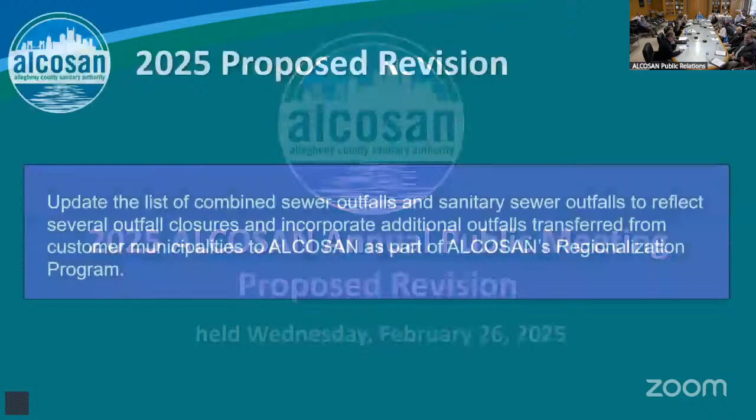All right, now you're going to make me work this one, Derek. Okay, there we go. So the first revision to the consent decree is to update our list of combined sewer overflows and sanitary sewer overflows. That consent decree was written in 2008, which had our original outfalls, but as you know, our regionalization program has taken off and we have adopted more outfalls, and now we want those included in our consent decree. So when we go through revisions, we'll be continuously adding those as we incorporate them into our system. That was the first proposed revision.

The second proposed revision is that we're providing a process to eliminate a primary treatment tank. That elimination is, we have a redundant wet weather tank in the wet weather plan, and this elimination will still provide equivalent treatment. It will have the same end results and it meets the goals of the consent decree. So the provision is to eliminate this tank and have the agencies incorporate that into our revised consent decree.

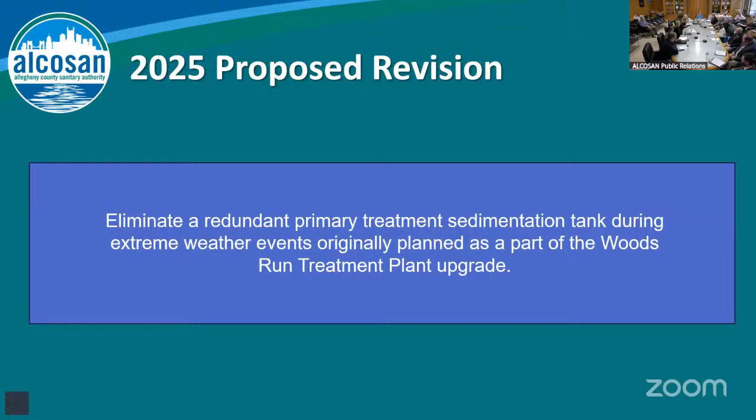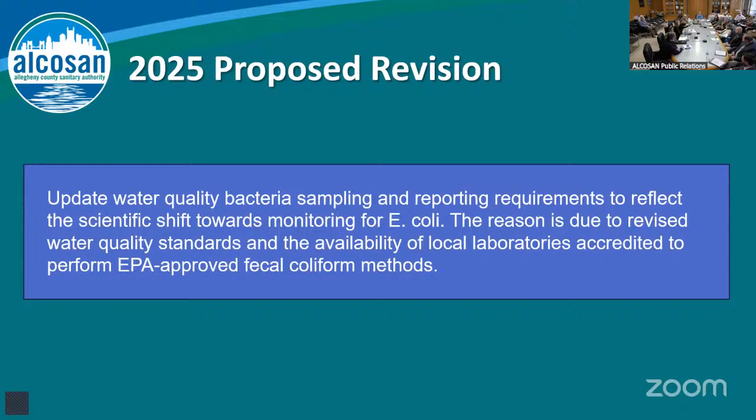And the last change is kind of minor, but not really. We have fecal coliform in our consent decree for water quality bacteria monitoring, and since the 2008 consent decree, E. coli has been more the parameter for measuring water quality. Furthermore, fecal coliform on surface water has to be monitored by a membrane filtration method, and labs aren't readily using that method any longer because there's a new color method that's easier, but that's only used for E. coli - on surface waters you can't measure fecal coliform with this improved method. We've been meeting with USGS, the US EPA, DEP, and the health department on this, and they are in favor of this revision, and we will materialize that in our request.

So you're doing testing of stream water? Yes, water quality monitoring below the outfalls, in general, as part of our post-construction monitoring plan. So as we do revisions and implementation of the clean water plan, we will do water quality monitoring and produce results in a model to perform like an outcome of the improvements.

How do you separate someone who's upstream from this? That's the beauty of the model - it will be able to simulate how we cause or contribute to water impairment, how the outfalls do. So the model will take into account what's coming into our system, what's in our system, and what the water quality is as it leaves.

Do you monitor just along the rivers or do you go up in the tributaries? They'll be up in the tributaries as well. Like in Shaler, I mean, I have a sanitary sewage treatment plant north of me.

That is why the use of a model is necessary, because you can add those nodes into a model to simulate the water quality. This is a model that ALCOSAN has established for many decades, and the added data we're adding now only builds on this analysis. It's incorporated into our consent decree as a requirement as well, and the plans have been reviewed up to this point for us to start the monitoring by the EPA.

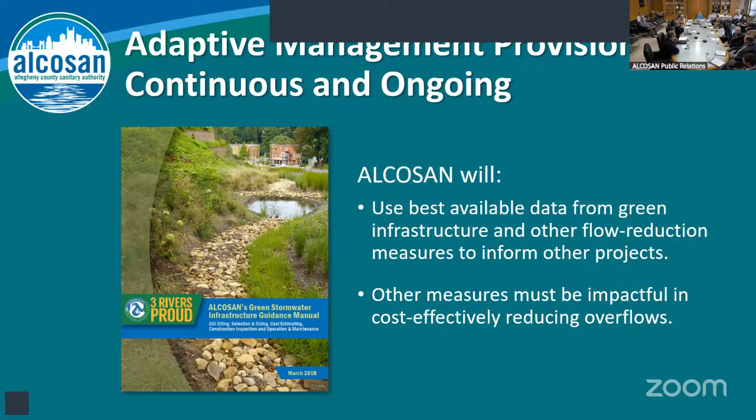Yeah, the YouTube, it is worthy. I know Jeff Ardress does a great job at the flyovers of the plant, and that's really impressive when you see it from a flyover and some of the animations that Jeff provides, and others as well. We have grow, regionalization, and the tunnels—those are the four pillars you can navigate through at that meeting. So it's a great one to revisit.

All right, thank you. Thank you. Very good, very good.

And next we're going to have a recap of the ALOM conference and the various presentations and activities that ALCOSAN participated in.

Ready? Yes, report to the advisory committee. Who was at the ALOM conference?

Oh yeah, I was there. So, Sharon, do we have the gifts for the people that were not there? Yes. Okay, so Patty and Lloyd need the gift, since you didn't get the lunch. And you're going to get the gift.

We had a great attendance at the meeting. We had some terrific comments afterward. But we wanted to review with you what we said so that you could ask more in-depth questions if you wanted to. So I guess I should toss it to Julia, right? She's the first one on the agenda. Julia is here somewhere from the regionalized world.

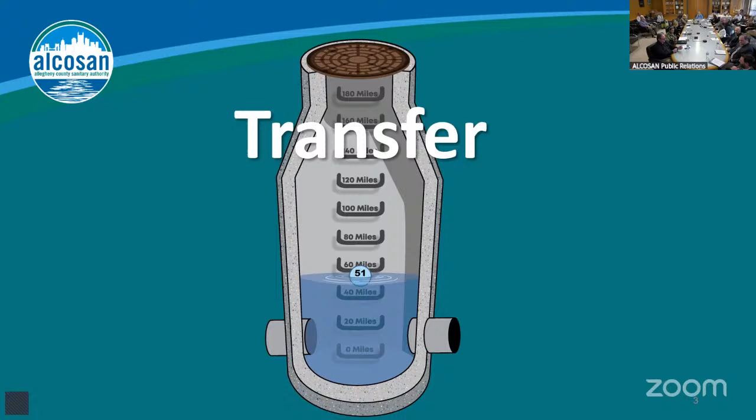If we go on to the next slide, we begin to look at why the program exists. This is one of the 4 pillars, as Michelle mentioned, of the Clean Water Plan—the pillar focused on improving the infrastructure that's there. Regionalization is truly about improving that system that has existed and served the region for over 100 years now. Many of the permits we look at are from 1929, 1930, so this is infrastructure that's been the backbone of our region. And now we transfer it, meaning operation, maintenance, and future improvements come along with that transfer to ALCOSAN as well.

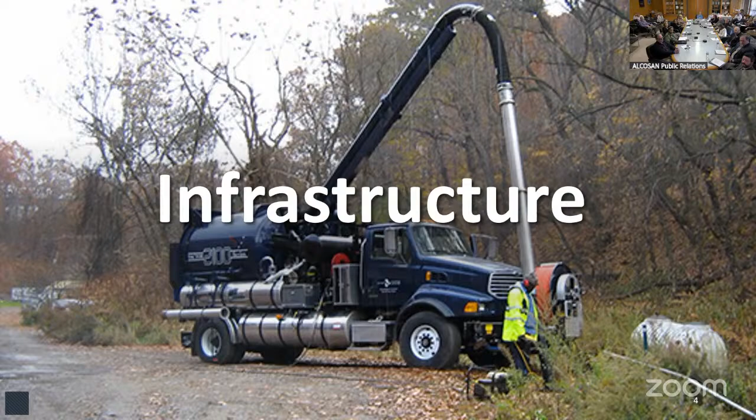Going on to the next slide, we're looking at the streamline of compliance. I mentioned those permits we've been reviewing—once they're transferred to us, we become the permittee for those miles of sewers. I think it's really important that we're also responsible for the overflows and the regulators that come along with them. In total, there's a little over 80 that are eligible to transfer. We've now had 7 CSOs and 4 SSOs, and actually it's more CSOs with this final A68 transfer that came over.

So immediately, our crews begin going out, inspecting, monitoring. You'll see the CSO signs with ALCOSAN contact information and notification go up at those locations. Tim and his crews begin flow monitoring so we know how to ultimately control or eliminate those structures. We become the point of contact. Through regulatory agencies and collaboration on the COAs, many of those projects are saying, here's how we'd ultimately have to eliminate that SSO.

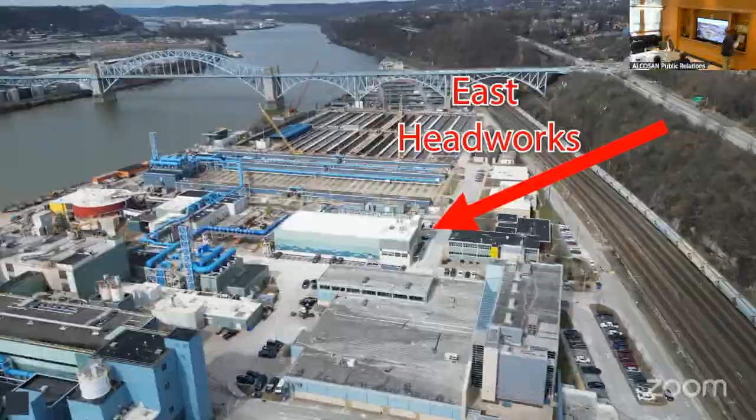Where we're going to stop first on the tour is the East Headworks facility. You've likely seen this if you've come out to open house. It's been the backdrop since 2021, and it's been different every year. The first year it was just a deep hole. Eventually, you can see the foundation being poured.

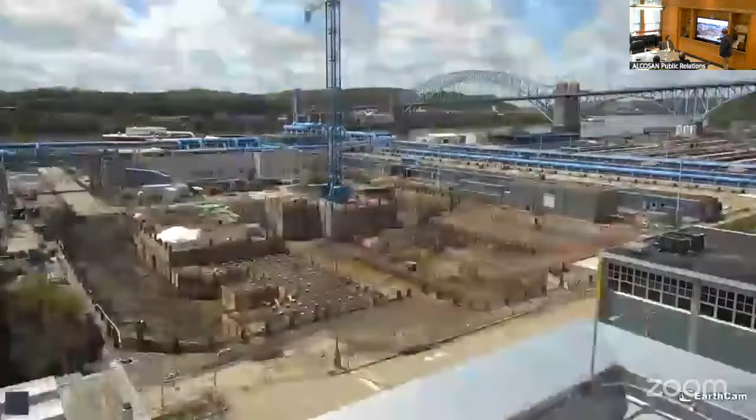Our tower cranes were a big highlight in an open house one year.

Eventually the concrete starts being poured, and you're going to see a large concrete pour in this area. That happened in July of 2023. The steel went up, and we highlighted the topping out of this last steel beam in August of 2023.

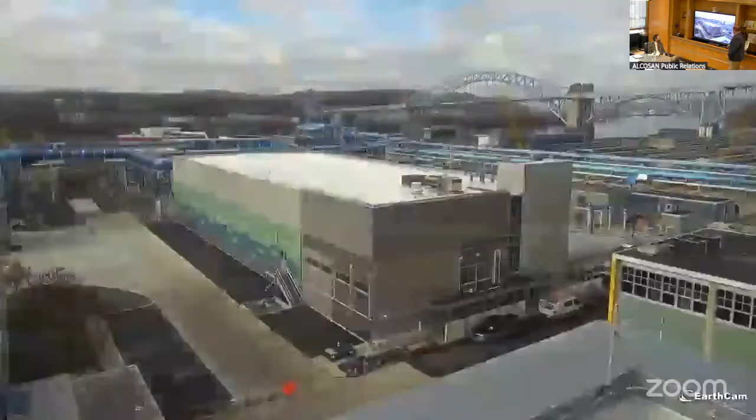So that was the backdrop of Open House 2023. In the time since, one tower crane's been gone. Eventually you'll see the other one go, and you'll see the concrete pavement coming along the side. So again, this will be the backdrop for Open House 2025, but we're going to see a nice, beautiful building.

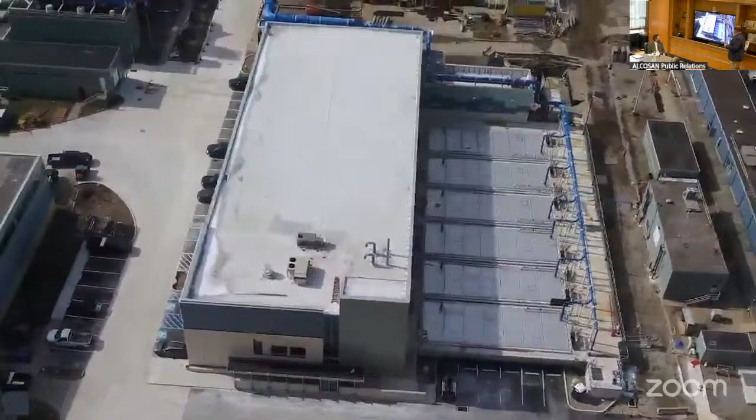And so our facade, you've got the drones circling it. You can see all the different sides. The blue piping, what that is, that's our odor control system. This is all tying into our existing odor control system to make sure that our neighbors are getting treated air around us.

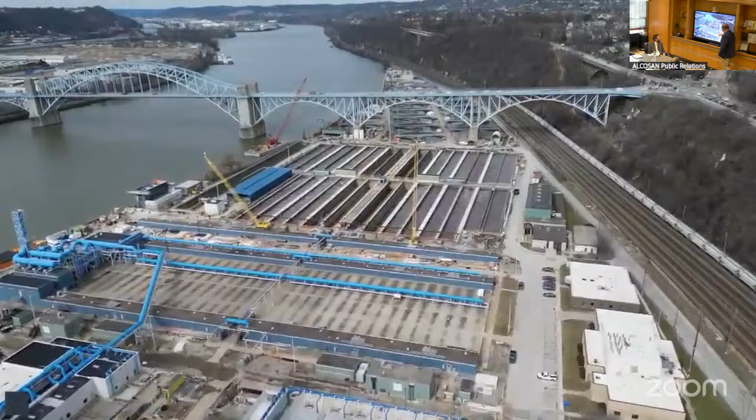As our tour continues north, you'll see our primary sedimentation tanks. This is where we're going to build that new one. These are the two buildings that have to come down as a part of that. So those staff moved into that environmental compliance facility.

Our next stop on the tour is our CSO bypass and disinfection project. This project's been under construction since late 2022. We really started to break ground in 2023. And where a lot of the work has occurred to date is back in this area.

It's really hard to see. I promise in the next couple slides I'll show you some overhead views. But that's the connection point between primary treatment and secondary treatment.

The other thing that we really have to show for this project is this new chemical building. We are in the riverfront zone, so we did have to work with the city to make sure that the facade of this building looks like a nice, beautiful image from the river. And so that is what you're seeing with this building.

So we've got the facade built. We haven't moved any of our chemical tanks in there quite yet, but you can see the building itself is just about complete from the exterior. The final piece of this is a reconfigured bypass disinfection tank.

These next videos will really show what the purpose of that is. We've actually just earlier this week placed a time-lapse camera kind of towards the bottom left of this screen. So hopefully in the next year we'll have some nice imagery to show as far as what's happening up here.

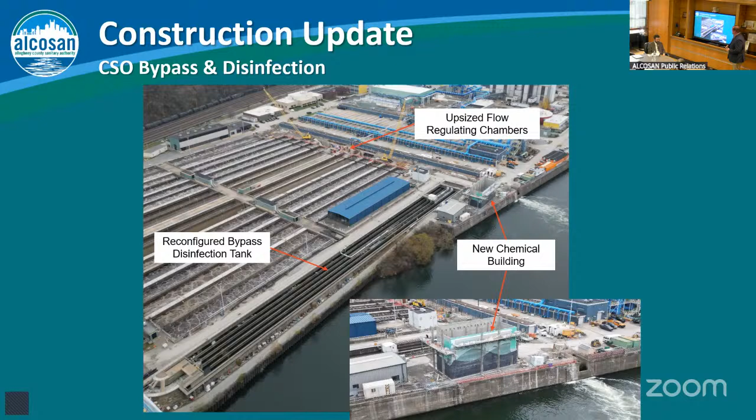Those upsized flow regulating chambers, where a lot of that work has occurred in the last couple of years - what I have here are three images that show the process. The bottom of your screen, that's primary treatment. The top is secondary treatment. The only thing connecting these two treatments is this buried piping. It's not an open channel where flow goes through.

This is where we actually measure plant flow. It's the one master location. We've got eight different connection points that connect primary treatment to secondary treatment, and we're replacing them in pairs. The first two were the two towards the middle, one on the east, one on the west.

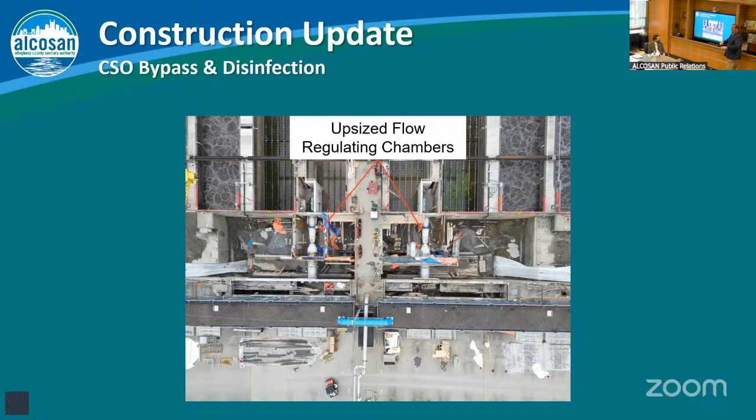So here you're seeing the exposed piping. You have to keep in mind, this is usually buried piping, below a road. Eventually, over time, you can see our concrete starting to be formed and then poured. I don't believe I have any images today, but we've actually just turned phase one, which is these two pipes, on. Eventually this will come back up to the surface, be backfilled, and it will be a road again.

What we really had to do here is increase the size of the piping because, as you all know, our plant expansion goal is more than doubling our plant's capacity. So we have to get from 250 million gallons per day up to 480 million gallons per day through these pipes, and the only way to do that was to upsize.

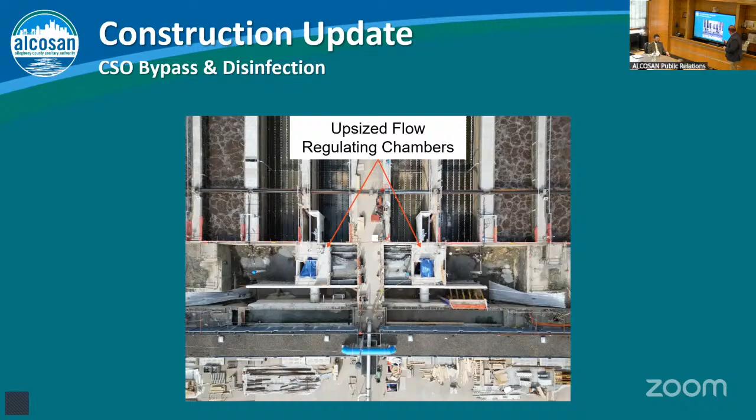The other thing to highlight, and again I showed this at ALOM, but as a reminder, this is that area where we just put that time lapse. What's happening here today is all being demoed at that northern extent.

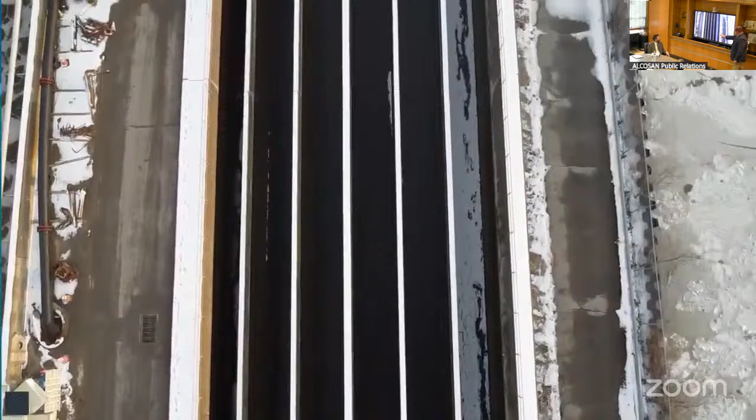What you're seeing is from January 15th - I took this video showing we don't have flow in this chlorine contact tank. This was during a secondary treatment shutdown where we had to do a major construction element of our North End project and this project.

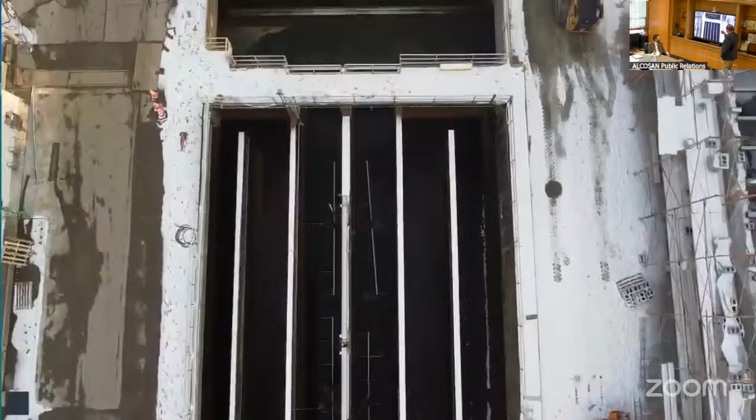So what we're seeing is the path that our flow has taken since 1970 when secondary treatment went online, and eventually you can see it goes out to the river, and that's our old outfall.

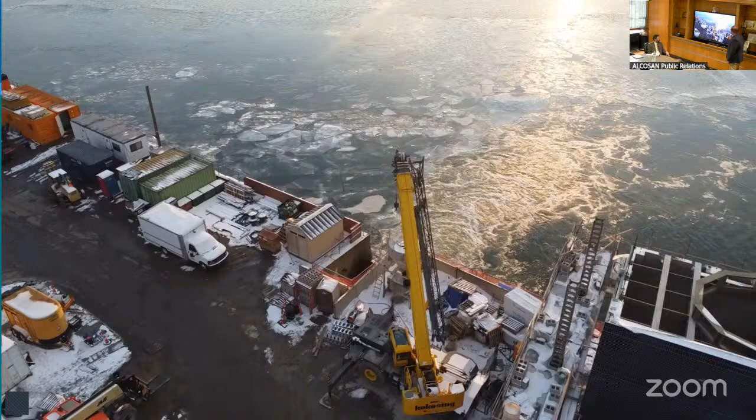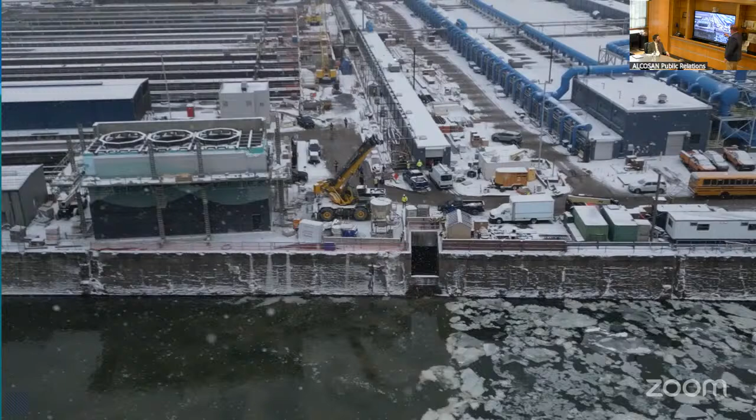This transitions into a video from the outfall showing the final moments on January 16th when we retired our outfall. The drone is going out into the frozen Ohio River, and it really gave a good delineation of where our outfall was. You can see it settles, there's no more plume, and that's the retirement of our legendary outfall that's been in service since 1959.

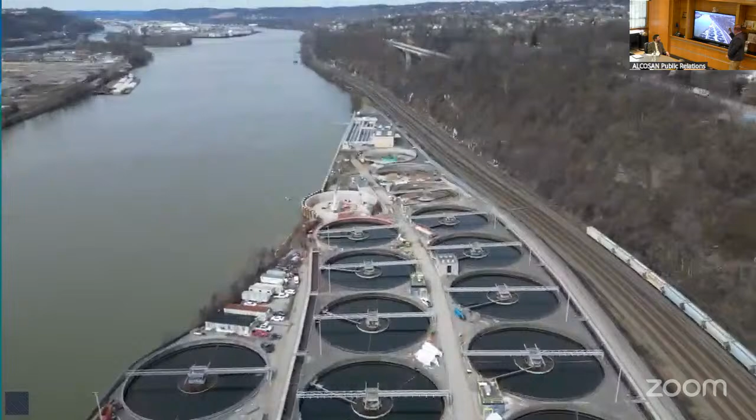As I mentioned, you have to remember we bottled up all that flow. We stopped discharging it to the river, so we had to figure out where to send it. This is where we're going to go next - we're flying north all the way to our North End project.

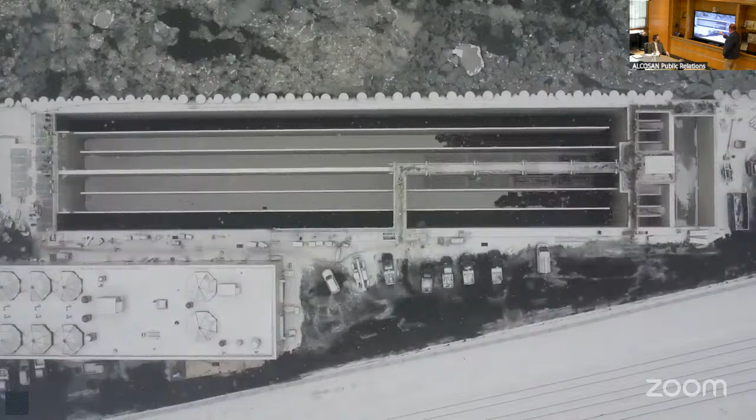On January 16th, once we started bottling up, the flow reversed direction, and we sent it to this new chlorine contact tank, our new disinfection tank. What you're seeing is a video sped up about 10 times - about 15 minutes of that contact time.

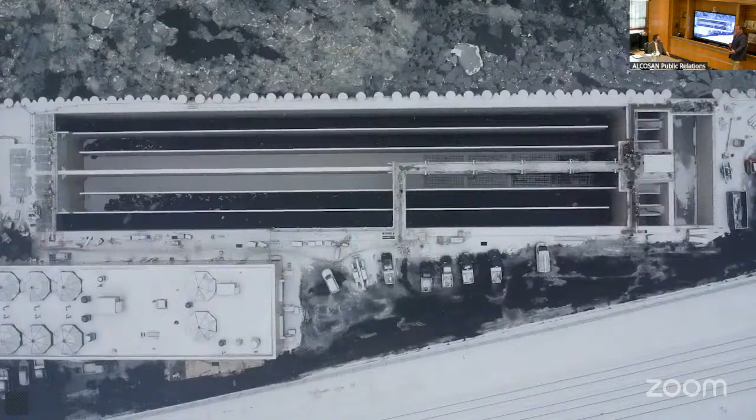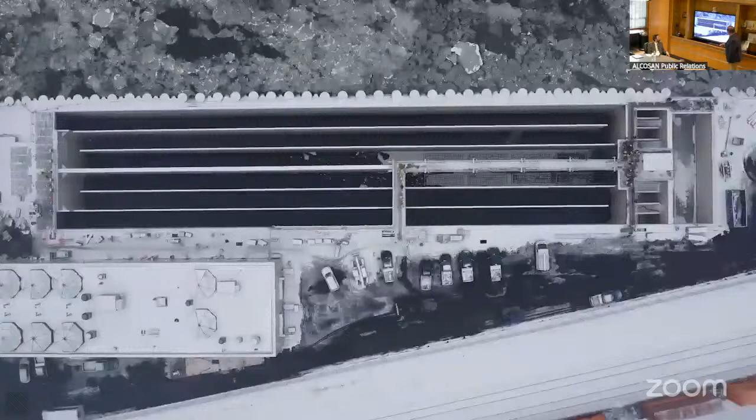The treatment process and disinfection, that's how it works - you have the chemical interacting with the flow. So you're seeing the first drops of flow going through our new disinfection tank. What you're seeing over here are our air diffusers to mix the chemicals, but also to add oxygen prior to discharging it out of the outfall.

Eventually what happens is the water raises up in this disinfection tank - it's about 15 feet deep - and eventually it overflows into these new troughs. This is our new effluent.

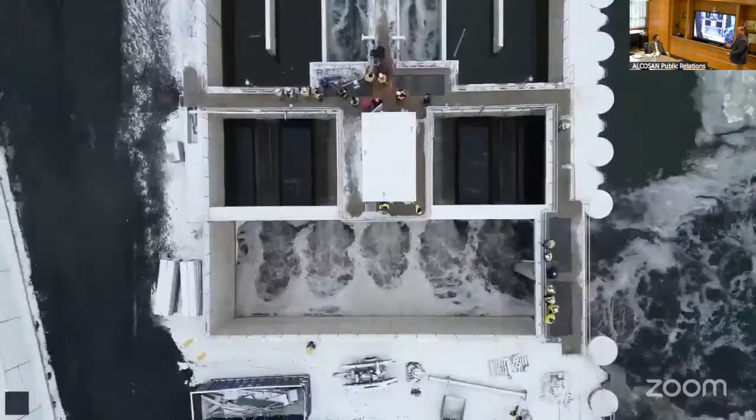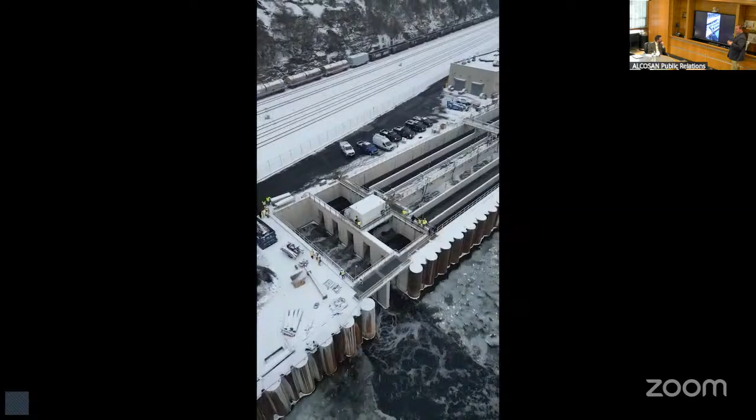I think it's a beautiful image. I mean, it's a sewer outfall, but it is a nice looking outfall, and I think it's something we should really be proud of. So these are the first drops going out of our new outfall - all that flow we bottled up at our old outfall is now going out our new outfall.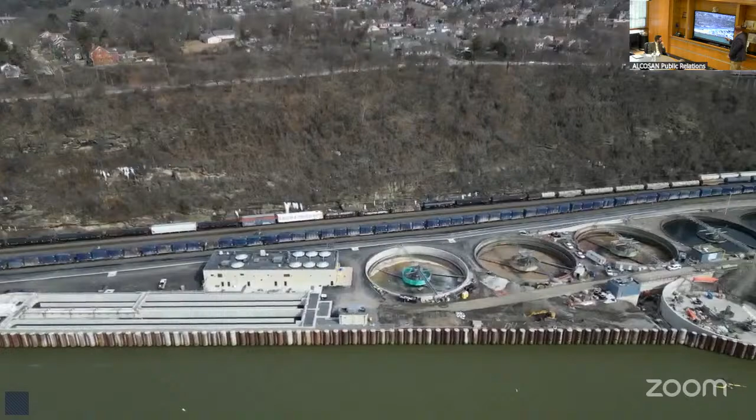So we'll continue going south again. This is the final detail of our North End project. We've turned on the disinfection piece of our North End project, but how we're going to get up to 295 million gallons per day later this year is by completing WFS9.

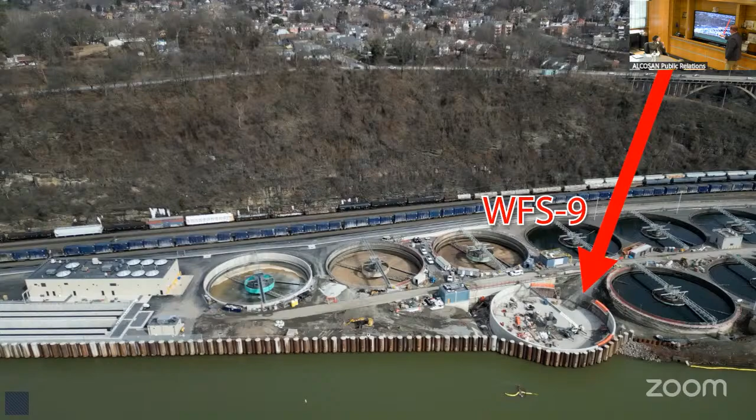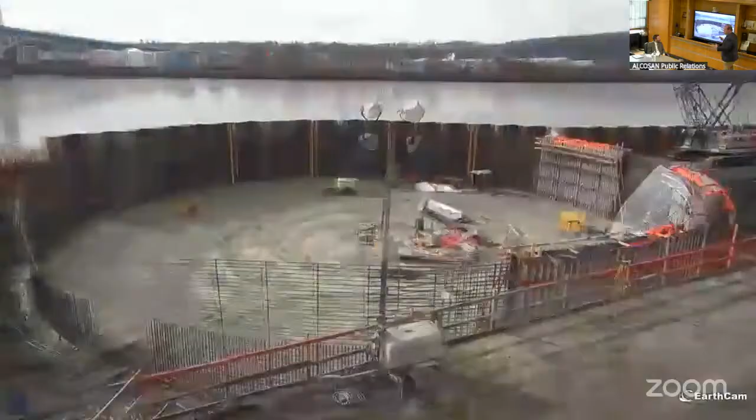The other item is EFS9 - we're mostly done with that one, so the focus has been WFS9 over the last year. We've got about 8 months of construction sped up in this time lapse. You have to remember, this is a 140-foot diameter clarifier. It doesn't really come across like that in an image, but this is a giant one.

This is going to bring us to a total of 18 - we've got 18 140-foot diameter clarifiers. Once we activate this at WFS9 later this year, that will get us up to the 295 million gallons per day.

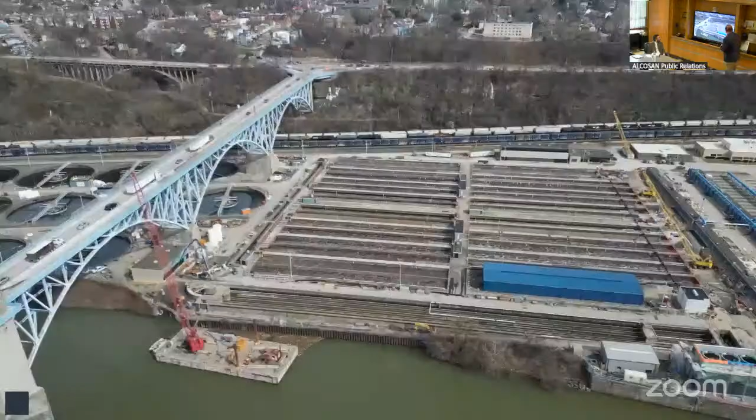Then we're going to head to our last stop. We're going to go south of McKees Rocks Bridge again. We're going to end up going by our main pump station, that red building, which you've all been on a tour before, and you've seen into that wet well - that's the location of it.

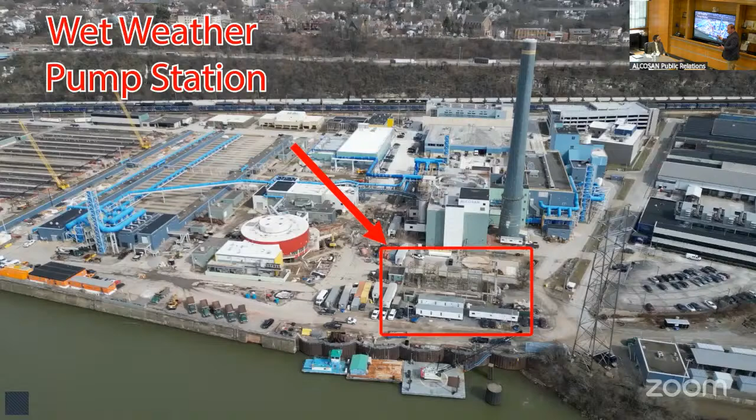But our final stop's actually going to be a future project, our wet weather pump station. What you're seeing in the background is just a dead substation at this point - we have to demolish that to get started.

What I really want to highlight here, because I'm going to hand it over to Sean next to talk about the tunnel, is this project is the connection point between the plant expansion program that I'm talking about, and also the tunnel program that Sean's going to be talking about.

So here's that wet weather pump station, here is that existing main pump station - it's about 200 feet right across the road. And then also what I'm showing here is our dewatering tunnel. It'll be about 160 feet deep, and it'll connect from our wet weather pump station to the first Ohio River Tunnel shaft.

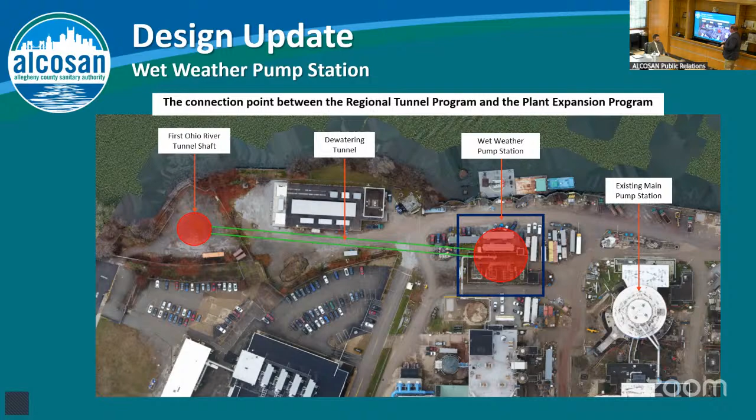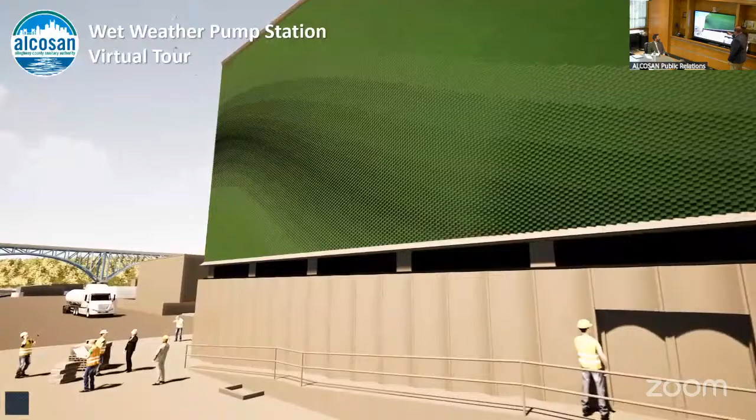So I do have a virtual tour of this wet weather pump station. Starting off, we're on the west side facing the river - a reminder, we're in the riverfront zone, so we need to make sure that the facade accessible to the public is showing a nice image. What we've done here is cost effective, but it's also a nice looking building - this is really just standard brick with different angles showing off different shades as you walk by.

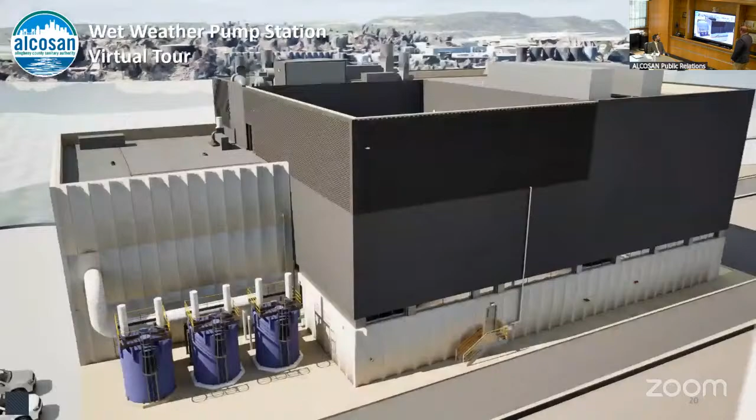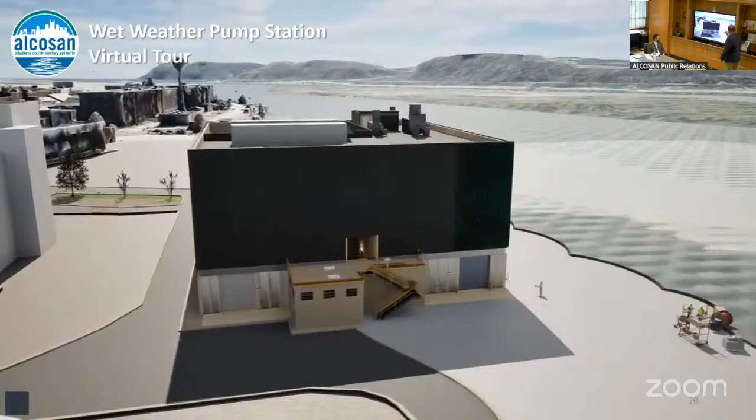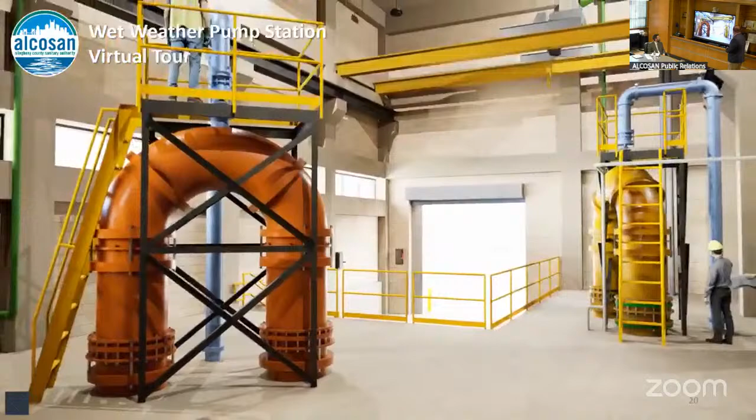This is siphon piping. So we've got 6 of these for each of the 6 pumps that are down in the basement. What this does is the flow goes over this and then discharges out into treatment at the rest of our treatment plant. Then we're going to enter our elevator, and the elevator is going to take us down about 150 feet down to our pump level.

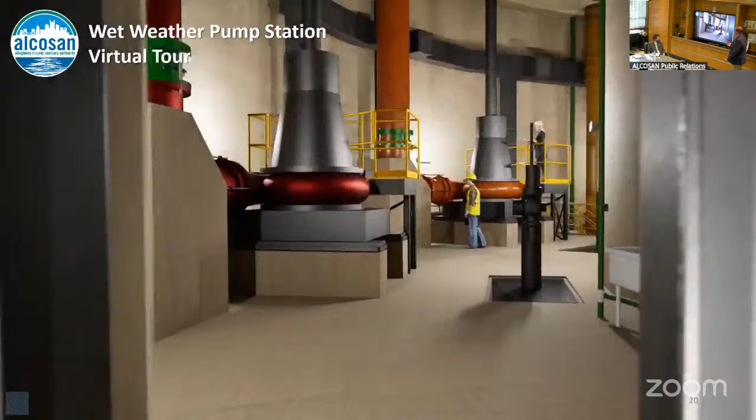This is a stop on the tour in the main pump station that we don't usually get to take. We don't get to take people down to our pumps, but because it's a virtual tour, we're going to get to see our 6 pumps down here. And you'll notice 4 at the one level, and then we're going to fly over the 2 at the farthest end. And there's a reason for that.

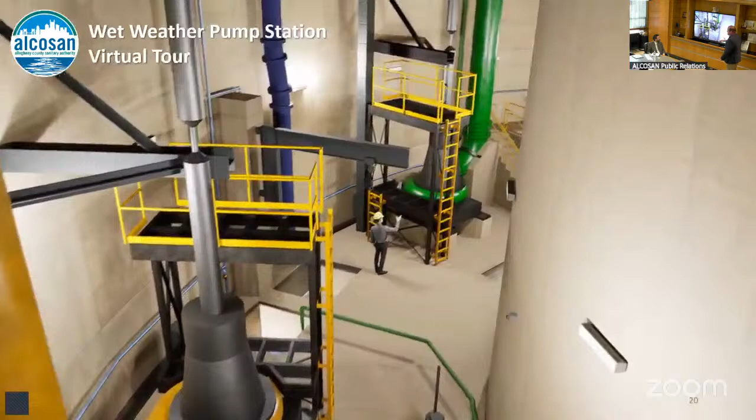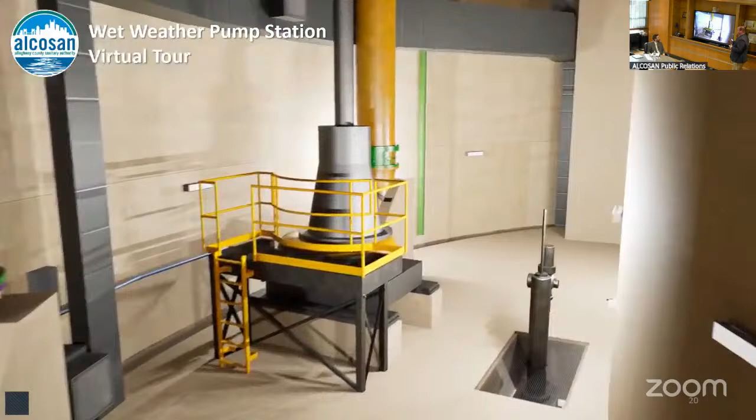This tunnel is going to operate at multiple different elevations. It's going to operate as low as 5 feet and as high as up to almost 95 feet in the tunnel. And so these pumps really have to operate against a lot of different static head conditions. And so because of that, we have 2 pumps at a lower elevation.

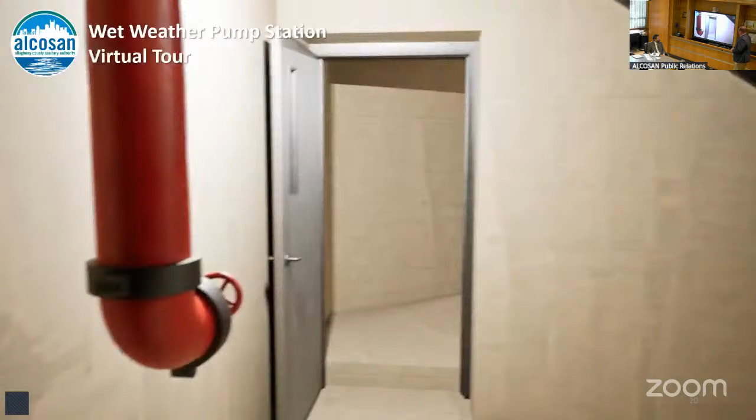And then we're going to enter a door that's going to bring us down even lower. And this is going to take us to the new lowest point in Allegheny County. This will be about 180, 185 feet deep. We are actually below the pumps at this point.

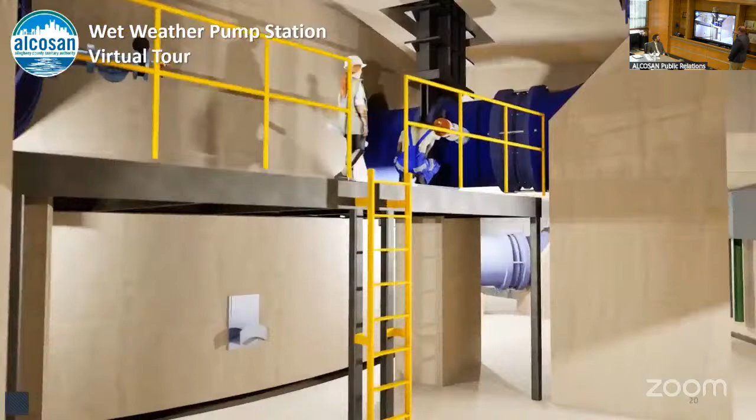And so on the left side of the screen, that is the wall that's separating the wet well from the dry well. And then we've got our horizontal piping that is going to suck the flows in from the wet well into the pumps right above us, up into that upside down U piping.

So we're going to walk around this 3rd pump, and then what you're seeing on the right side of your screen, these are kind of emergency flow pumps that if we're seeing flow in our dry well, we need to make sure that it's not going to flood out our dry well. So that will handle those sorts of flows.

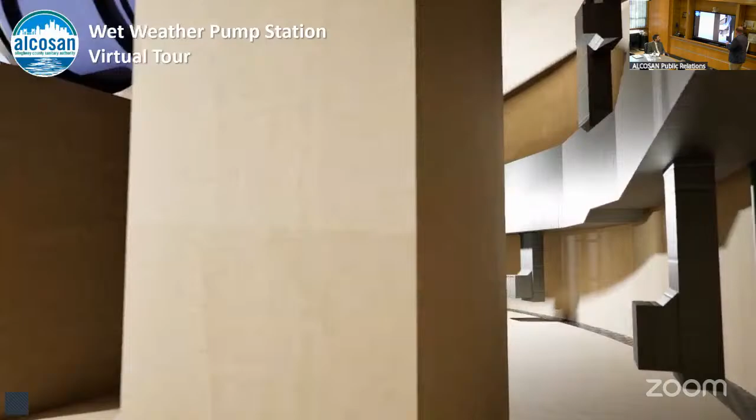You're seeing some duct work along as we enter, or as we go by the 5th and the 6th pump. And then we're going to enter the elevator, and then we're going to go up 2 floors from here.

We're going to go by the pumps, but you have to remember that pumps don't operate on their own. They operate with motors. So we're going to go to the motor floor. And the motors are going to be extended shaft motors that sit basically about 15 feet above the pumps.

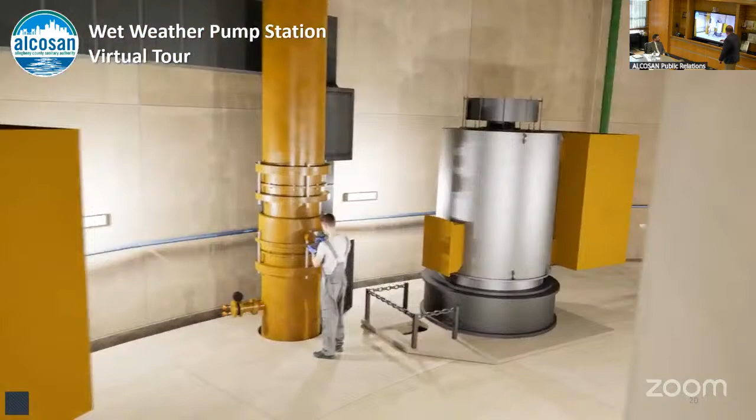This is a little bit different than our main pump station. Our main pump station, they actually sit on sort of tripods. But in this pump station, we're actually going to have their own dedicated floors. So we'll walk by these 6 motors, and then eventually we're just going to kind of zoom up from here.

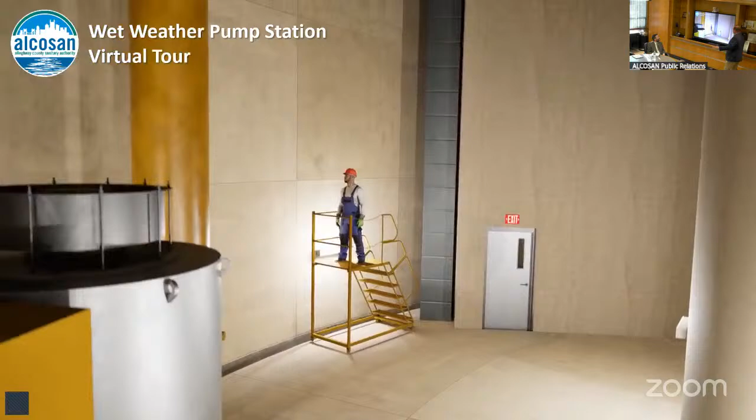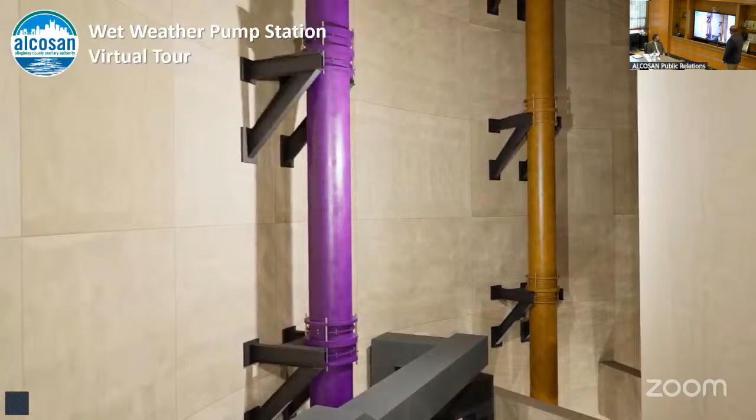We're not in any sort of an elevator. It's just kind of us flying at this point. You're seeing some of our cranes, some duct work, and then you're seeing just how much vertical piping there is with each of these 6 pumps.

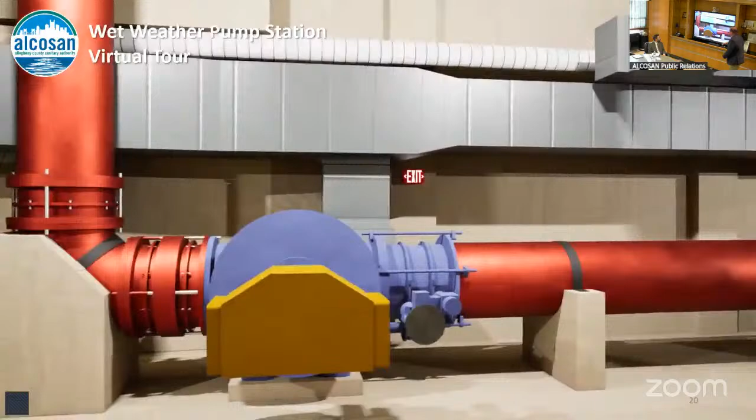You got to remember, this is 180 feet deep. So where we are now, though, I like to call it the basement, but it's a confusing term because it's just the floor below where you are walking into the building.

And what you're seeing is the opposite side of the upside down U piping. This is our discharge side. And what you're seeing here, this is a control valve. It's a cone control valve.

So again, we're operating at multiple different static head conditions. So these cone valves are gonna be able to introduce an artificial head to really help those pumps stay on their curve and operate in their preferred operating ranges.

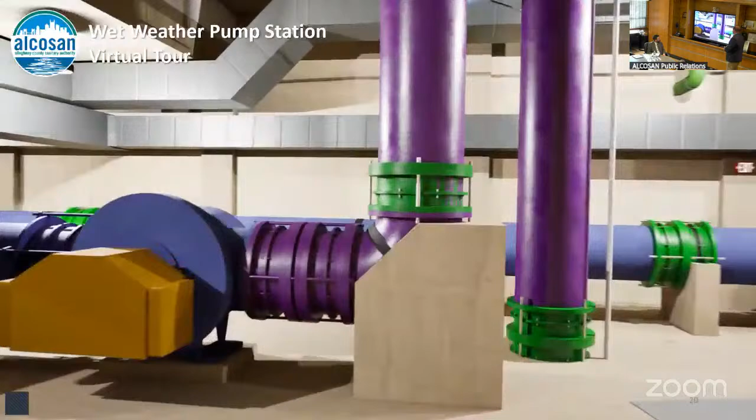So eventually, we are going to head back upstairs through this doorway, and we're going to end up right back where we started when we walked into the building.

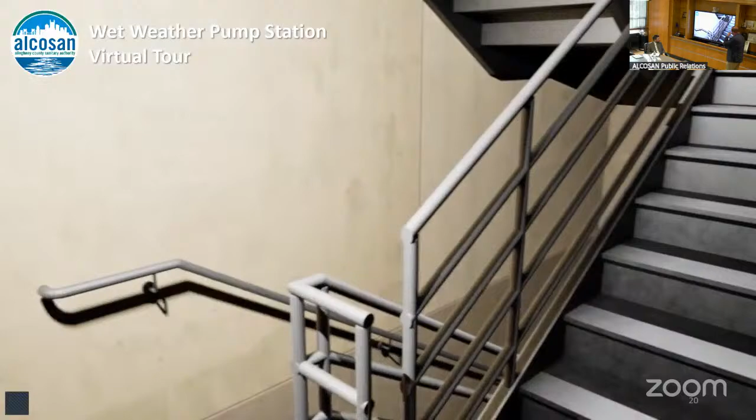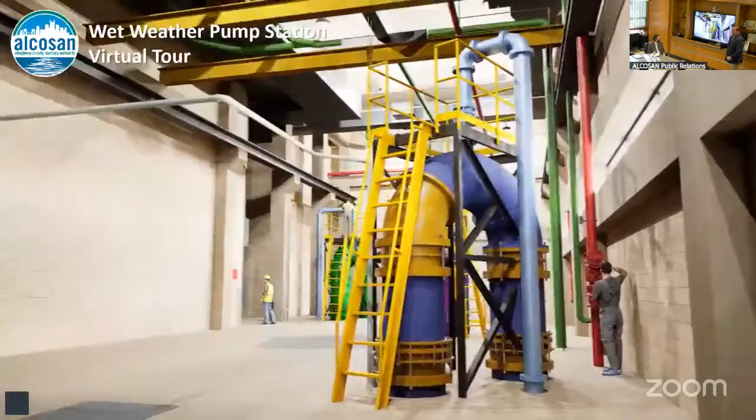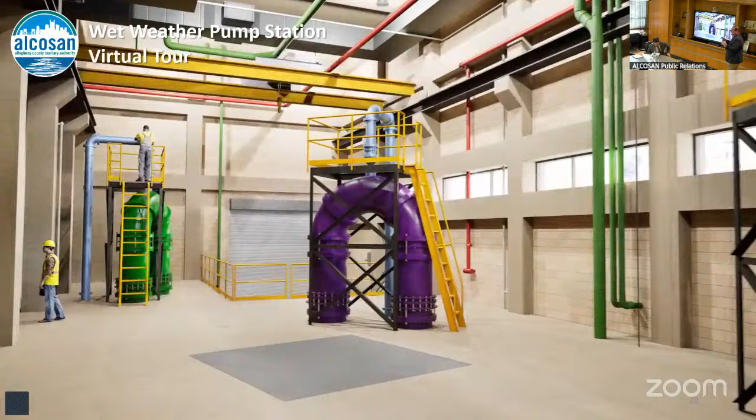The last thing I really want to highlight as we walk into this room is you'll see a bridge crane fly across the ceiling. I like to highlight this because as engineers, we don't always think about the end users, but at ALCOSAN we really do try to work closely with Doug and his staff, because operations and maintenance are the ones that need to live with this. We can't just design it in a box. We need to make sure everything we're designing is fully accessible by a crane, and we have to be able to pull these pumps and motors that are 180 feet deep with minimal interruptions.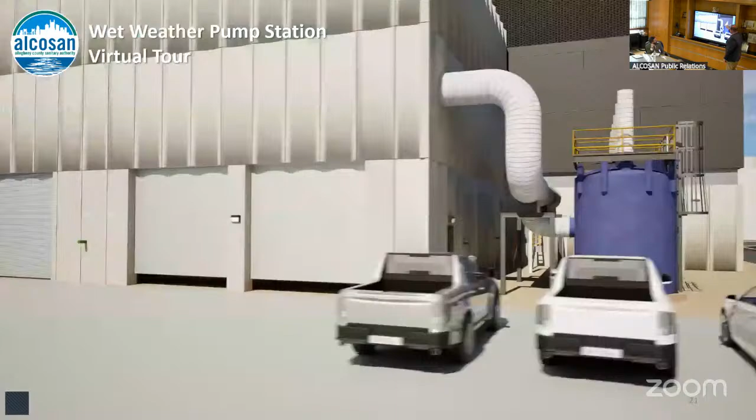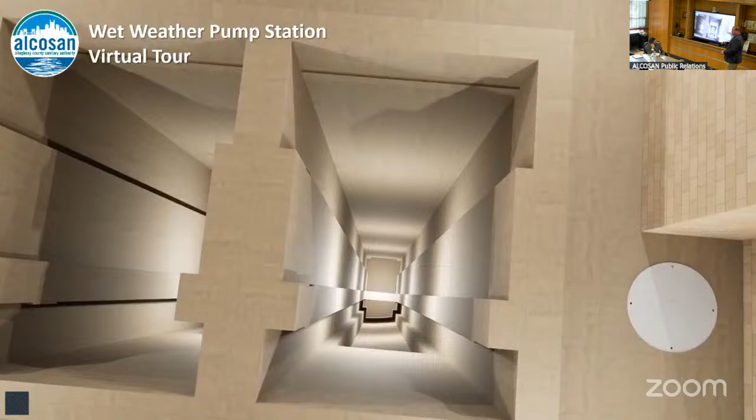So to wrap up, we're going to head back into the south side. What you're seeing over here is our future odor control system for the wet weather pump station. A couple things to highlight: we're just going to stay at grade here. Here is a future provision for screens. We are not installing it on day one, we don't envision that we're going to need it, but it's going to be much more cost effective for us to install it today.

The last stop I'll leave you with is looking down into the wet well. This is a stop we always stop at on our plant tours, but you're always seeing sewage. This is what it looks like without any sewage in it. You're seeing the other side of that discharge piping we saw. We're looking down about 180 feet, and this is where our pumps will be operating against 5 feet deep, or 95 feet deep.

So that's it for me. I'll hand it over to Sean.

Thanks, Jeff. It's always fitting for Jeff to go first on the plant upgrades and talk about the wet weather pump station, because the wet weather pump station will be the downstream end of where the tunnels connect and how it gets the flow into the plant. So with that, the pump station and the Ohio River Tunnel, our first tunnel project, will have to be constructed on the same time frame. One will have to be ready to go so that the other can operate.

So we've been planning for quite a while on the tunnel system, going back to the mid 2000s with basin planning, moving to preliminary planning. We started our first tunnel design, bringing the designer on board for that at the end of 2021, and we've been working on it ever since.

In all, with the new tunnel system, we'll have 16.5 miles of new conveyance that will be constructed. The main tunnel will be 18-foot finished diameter with two 14-foot river crossings that are part of the Ohio River Tunnel at Sawmill Run and then Chartiers Creek right outside the plant here.

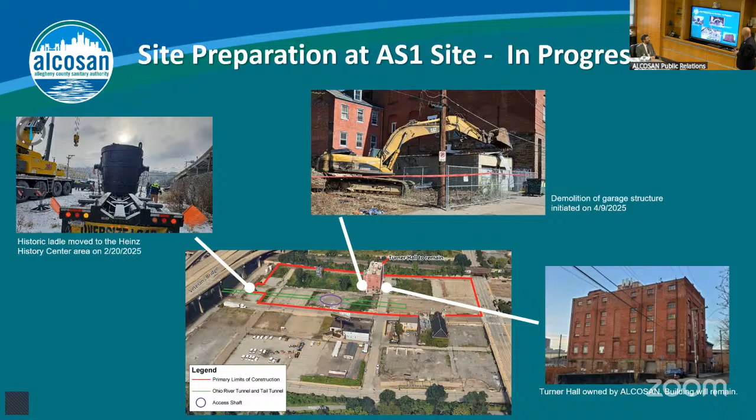We highlight the one building that's left in place, Turner Hall. That building is owned by ALCOSAN and being taken over, and we'll be maintaining that property. At the end of this project, along with the rest of the properties, we'll decide what the final use of that will be.

We're finishing up that project here, and within the next month we'll be putting that out on the street to get the work done. All this work is key so that when our contractor comes on board, they have sites that are prepared and ready to go, and we don't have to build this into their time frame.

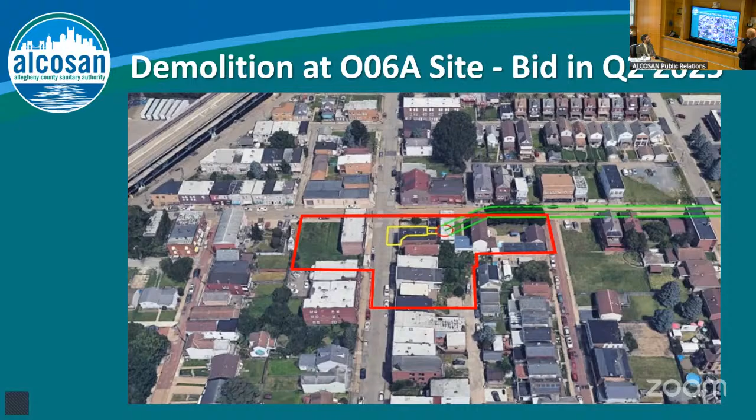Along with this work, we also worked with West View Water for this site. They had to go in and relocate some water mains so that's out of the way, because we'll be taking up a large portion of that street and having to work around the existing utilities.

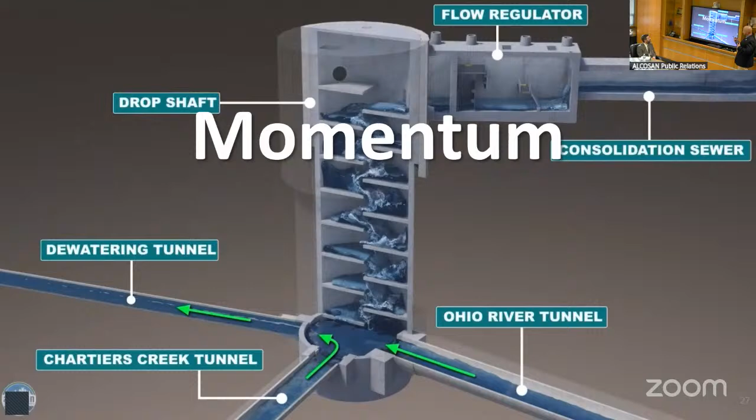So as we talk about the progress we're making, we look at the momentum of the program. This gives you an idea, this is our first shaft just outside the plant, O27. This is where the dewatering tunnel will connect into the plant and the wet weather pump station.

This is our typical arrangement of how we will direct flow from the surface structures down through baffle drop structures and into the tunnel elevation. As I mentioned, the tunnel elevation is approximately 150 feet below grade, roughly 50 feet lower than our existing deep tunnel interceptor. With that, we're able to drop flow down and work in this tunnel configuration with minimal impact on the surface.

Now this shows the arrangement or alignment for the Ohio River Tunnel. As I mentioned, that Access 1 shaft is located over here on the north side, just on the other side of the Veterans Bridge. That'll be our key site where we'll launch the tunnel boring machine.

It'll proceed downstream towards the plant and end at the O27 site, just on West Hall Street, right outside the plant. We've also procured that property off of our neighbor Sherwin-Williams, so that's an extension onto our existing plant property. And as I mentioned, there are two river crossings, at Sawmill Run and Chartiers Creek.

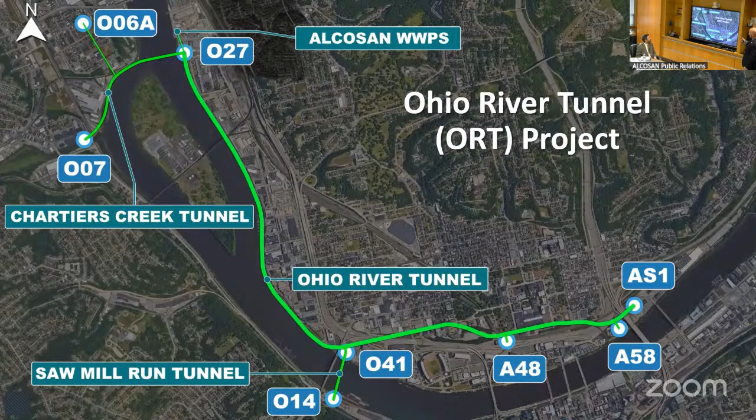Besides the site in McKees Rocks, the O06A and O07 site, the rest of the work will be completed in this phase within the city of Pittsburgh.

The other portion of the tunnel program we're working on right now is the Allegheny River Tunnel, since we just started the design on that at the end of last year. This is just a snapshot of one of the areas where we started some early design work in the upper Allegheny reaches, a redevelopment site located in Sharpsburg, Aspinwall, O'Hara Township.

So whenever we're completed with the work, majority of the work will be underground. People won't really know unless they were around that it is there. What we will have left behind is the buried infrastructure that'll operate, and this will be operating in parallel to our existing infrastructure, which will remain in service, only operating when we have wet weather and conveying flow to the plant.

On the Ohio River Tunnel, we only have two structures where we have above ground facilities that will be constructed, and that is for the active control gate locations. One of those is at 027, as I mentioned, on West Hall Street. And the other one, which is depicted here, is at A58, located over on the north side off of River Avenue in the area of Hamilton.

And so with that, we'll have a shaft, which picks up flow. We'll have sluice gates, which will operate in conjunction with sensors in the tunnel, and that'll be to protect the tunnel whenever we get rapid filling and air movement, which could create surge effects. These gates will close off so that flow will no longer enter for that period.

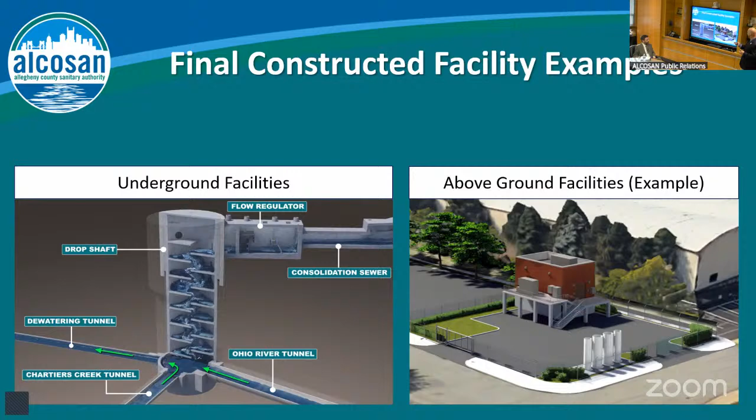And that'll keep it from surcharging more, damaging the tunnel and causing geysering conditions. At these locations, as with our other shafts, the only other above ground structure will be some type of venting, which we'll put in. And with the nature of the tunnel and the research that we've done, we don't anticipate that there'll be a need for odor control. So with these, since it's going to be very dilute, we'll just have vent stacks, which would be well above normal elevation for a person, and it should be very minimal, if at all.

With that, I will hand it over to Tim Kribos to talk about GROW. Thanks, Sean.

Okay, so at ALOM, Julia, Jeff, Sean, they talked about all the projects that are coming up. I ended it by talking about the project that is getting close to being - GROW has been around for now, we're in 9 years. And so I wanted to talk about the impact. And I also promised that my part will be very fast.

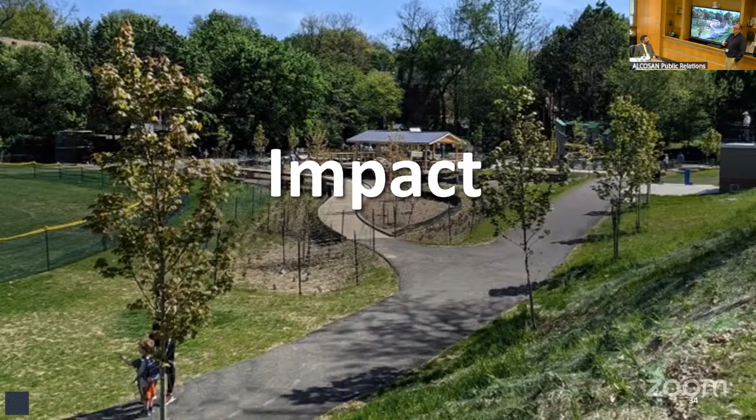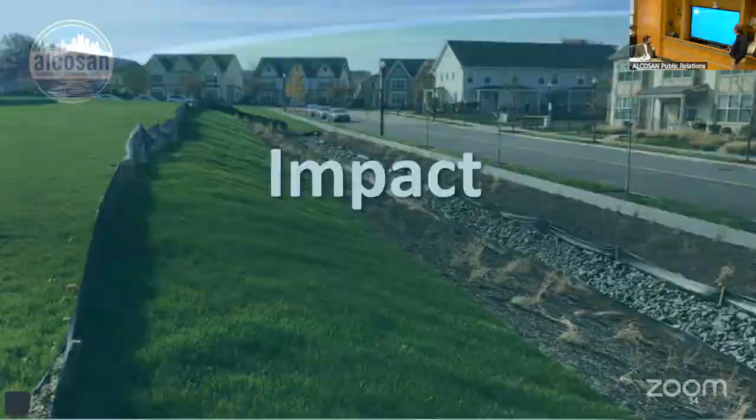So just walking through a few images of the various projects that we had throughout the service area. But what we wanted to focus in on were just where we're at. So $77 million of grants were awarded as of when we were at ALOM. 204 projects - one of the offers came back, they declined it, so it happens. So 203 projects in the ALCOSAN service area GROW.

As of ALOM, we have disbursed $31 million, actually as of the end of 2024, and those $31 million went to 111 of those 200 plus projects. As of the end of 2024, 101 projects had submitted final reports for us to review. This number has since the end of 2024 increased significantly.

The most anticipated reports that we got were several from Pittsburgh Water. So a lot of their green infrastructure projects, we finally received those final reports.

And finally, the impact that the projects - and they're not ALCOSAN projects, they're municipal projects. At ALOM, I wanted to make sure that I acknowledge that we're helping the municipalities, but they are municipal projects. And the results, based on the final reports that we received, over 1 billion gallons of water has been taken out of the system. And based on that knowledge and monitoring that had been taking place, rerunning the data, over 200 million gallons of overflow reduction. So the program's being successful, and 77 million out of the 100 million, we are nearing the end.

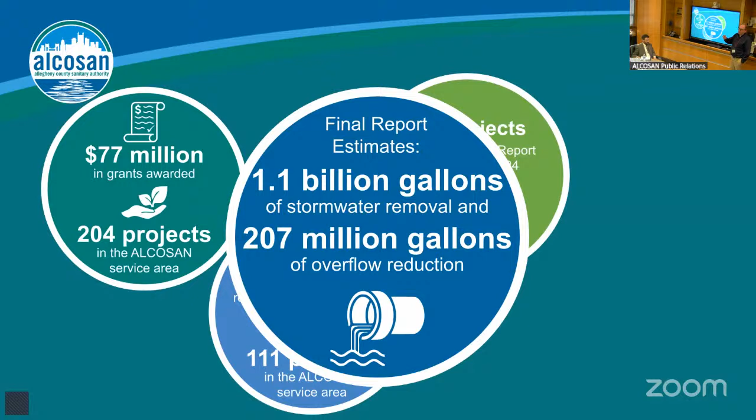And as I promised, that was very fast. I don't know if there are questions, but I think we're - do you want a question?

Yeah, go. I have a question for Sean. Sean, you were showing the tunnels and where they're gonna be situated along, especially, I'm curious about the Ohio River one, especially at Sawmill Run. And I would like you to speak to how you're coordinating efforts with River Life and their completing the loop.

Sure, yeah, we don't have a slide there for that, but we've been working in conjunction with River Life for a while now, as we learned about their plans for connecting the loop.

I was at a public meeting where they were talking about the progress they've made, and they have a very good slide showing their ramps and how they're configuring those coming off the bridge. It's hard to tell unless you have knowledge of it, but we've worked with them so they shifted their ramps to fit in conjunction with our shaft construction there. So we're clearing those areas for our work, and once we're completed, they'll have an area where they can go in and construct that. There's been very good work with them to make sure that's happening. They won't be able to get in to do that work until after our work's completed, but they're aware of that timing and know that space is there when we're done.